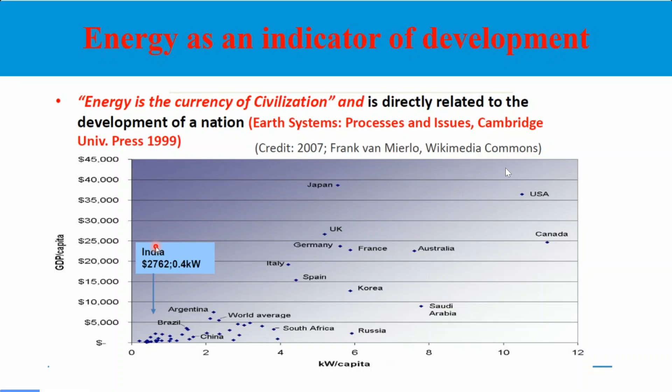Coming to energy as an indicator of development, another continuation of it. So what is GDP, the term we read in the last slide? It is basically the gross domestic product, the monetary value of all the finished goods and services provided within a country. It is given by the formula GDP equals C plus G plus I plus NX.

C is consumer spending. G is the sum of government spendings. I is the sum of all country business spending, and NX is the net export, that is export minus import.

Coming on to another term, energy intensity. It is basically the measure of energy efficiency of a nation's economy, the energy consumed per dollar of GDP produced. It is the ratio of the amount of energy consumed in the production of per dollar of GDP.

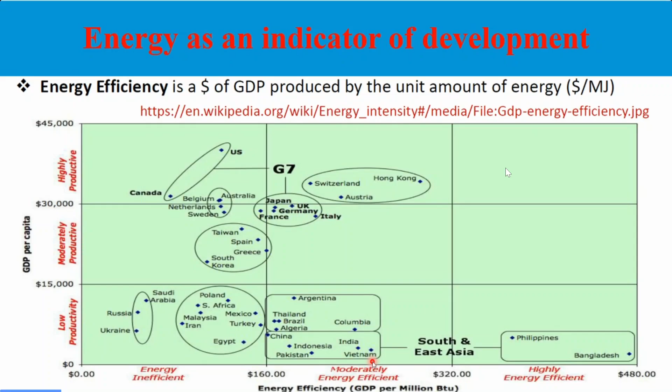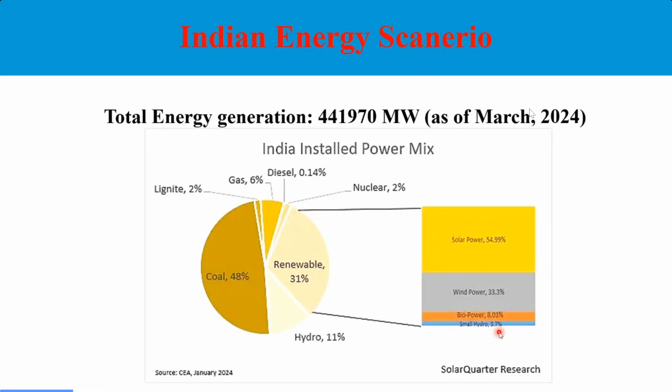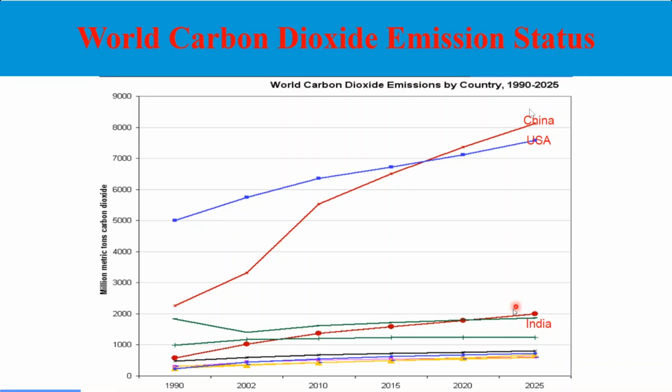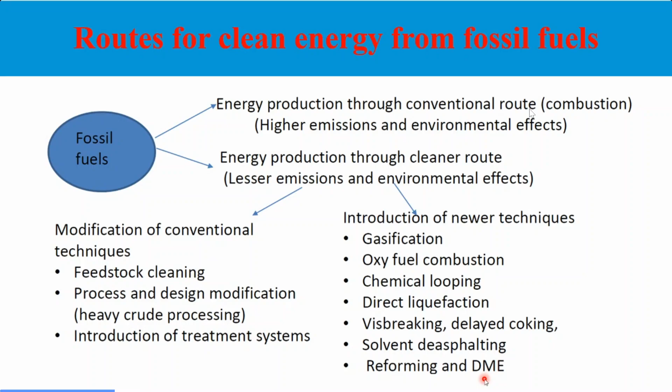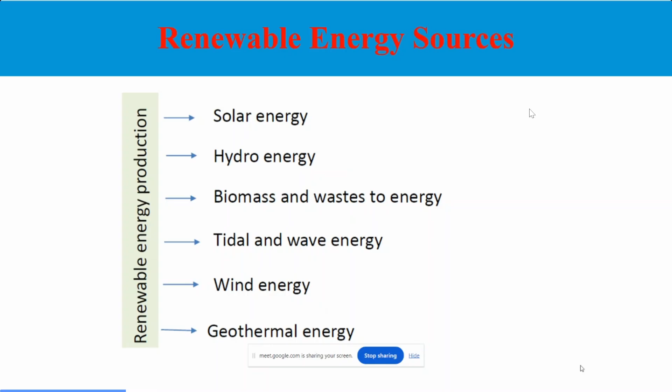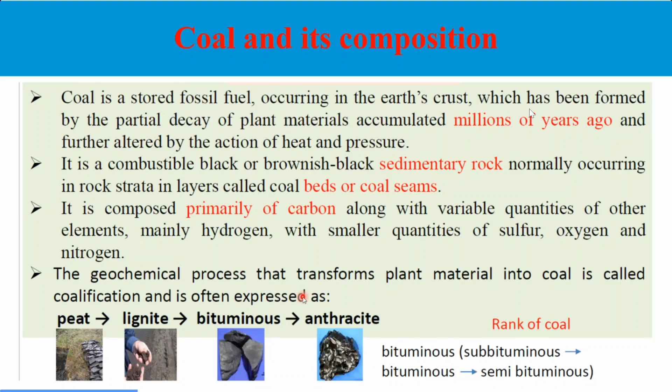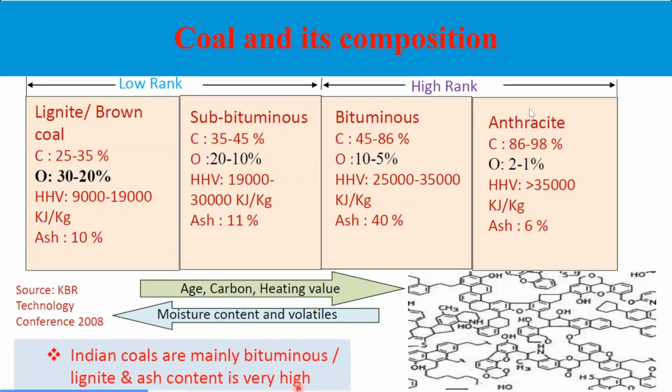Coming on to some of the coal reserves in India, there are basically two types, that is Gondwana coal and tertiary coal. Coal is found in various states in India such as Jharkhand, Odisha, Chhattisgarh, West Bengal, followed by many others. A total of 301.56 billion tons of coal reserves are estimated by GSI in India.

So, the two main types of coal are Gondwana coal, which is the more aged coal, that is 250 to 325 million years old, and tertiary coal, which is not that old, that is 10 to 60 million years old, and it has high sulfur content.

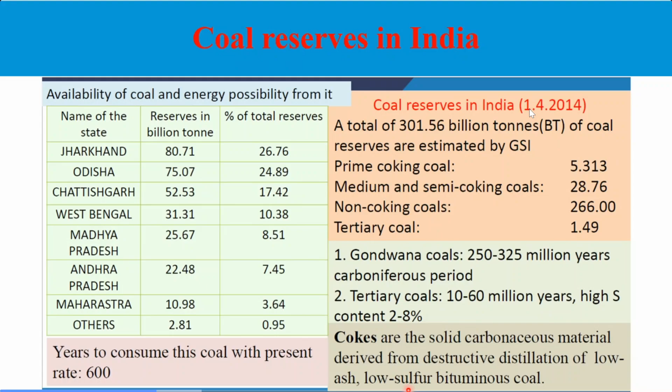Then what are cokes? Cokes are the solid carbonaceous materials derived from destructive distillation of low ash, low sulfur bituminous coal. Coming on to some other types of coals. Based on coking property, it is of three types: coking, semi-coking, and non-coking. Based on age of maturity, it is of two types: Gondwana and tertiary coal. Some other unconventional coals are also available, which are cannels and torbanites. They are rarely found and do not fall in any category.

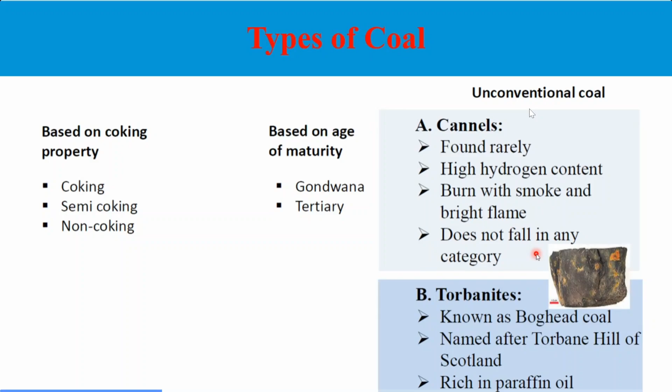Coming on to the grades of coal, the grades of coal are divided depending on the amount of moisture content and ash content present in them. Basically, coal is used in energy production in various industries. So, in the steel industry, steel grade coal is used, and in thermal power plants, washery grade coal is used. The classification is given here clearly in the table according to the percentage of ash and moisture content present in them.

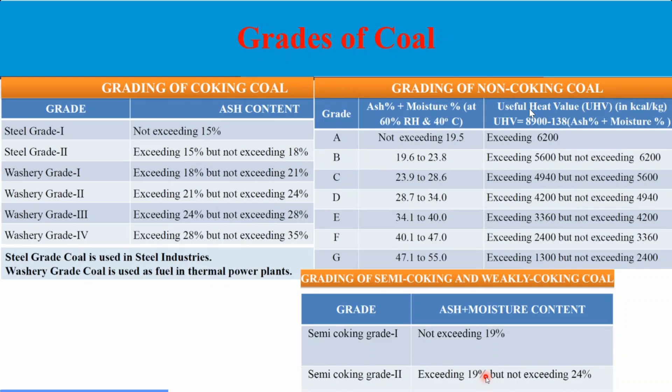Coming on to the treatment of coal, by the heat treatment of coal, three categories are found. Coke, which is the solid product from the coal. It is a grey, hard, and porous coal. Coke is used as a fuel and acts as a reducing agent in smelting iron ores in a blast furnace. Coal tar is the liquid product from the heat treatment of coal. It is a brown or black liquid of extremely high viscosity which smells like naphthalene and aromatic hydrocarbons.

And coal gas: when the heat treatment is done at a very high temperature and pressure, it gives out high calorific value gases such as hydrogen, carbon monoxide, methane, and volatile hydrocarbons.

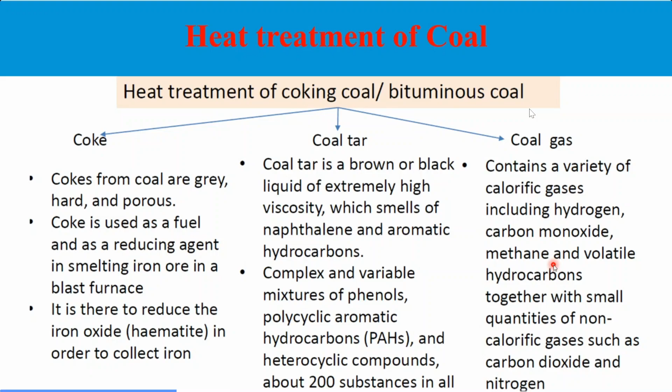Coming on to some of the properties of coal, coal has caking and coking properties, good heating value, moisture content, volatile matter content, fixed carbon, and ash content. Its chemical composition has carbon, hydrogen, oxygen, nitrogen, sulfur, and phosphorus, and sometimes iron also in small quantity. It has porosity, caking index, and swelling index, which we will be studying further.

Caking versus coking. On applying heat in absence of air, the coal swells and leaves a coherent residue. This residue is called the caking coal. In some cases, this caking coal residue possesses some metallic, grayish luster, and this type of caking coal is called the coking coal.

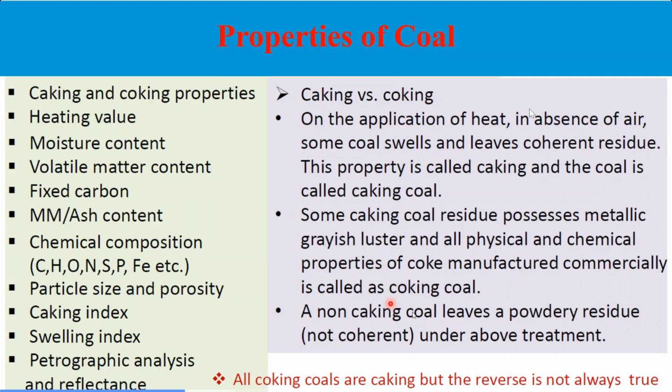Coming on to the two properties, that is caking and swelling index. Caking index gives an idea about the caking property of a coal. Basically, when we apply heat, the swelling of the coal takes place and it leaves some residue which is called the caking coal, so it gives the idea about its caking property. Normally the caking index for coking coal varies from 20 to 24, and for a beehive oven the minimum index value would be 13 and maximum 24. And the swelling index tells how much swelling of the coal takes place. A swelling index from 2 to 5 is ideal for coke manufacturing.

Coming on to the characterization of coal, it is done in basically two types, that is the proximate analysis and ultimate analysis. So, what is analysis?

In proximate analysis, basically we classify the amount of moisture, that is H2O, present on the surface or inherently present in the pores, or the residual moisture present in the coal sample. For analyzing the amount of moisture, the sample is heated at 105 degrees C for 24 hours, then the moisture is lost. Some volatile matter may also be present, which could consist of some paraffins or hydrocarbon part.

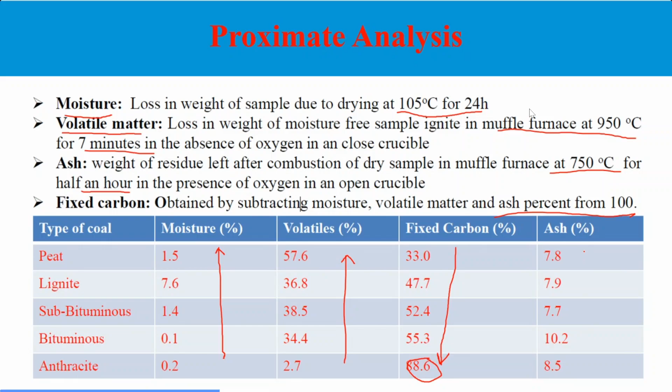The ultimate analysis is different from the proximate analysis. It is basically the elemental analysis. We can determine the amount of carbon, hydrogen, nitrogen, and sulfur present in the coal sample. The principle of CHNS is basically that the sample is heated in the presence of oxygen at a temperature of 990 degrees C. So all carbon present easily gets burned to carbon dioxide, hydrogen burns to H2O, and nitrogen burns to nitric oxide, that is NO2.

For analysis, the product gas mixture flows through a silica tube packed with copper granules. This zone is held at about 500 degrees C. So this mixture of NO2, SO2, CO2 and water is passed through a silica column. Remaining oxygen is bound, and NO2 is reduced, and the leaving gas stream includes the analytically important species such as CO2, H2O, and nitrogen. Eventually, sulfur dioxide is absorbed at appropriate traps.

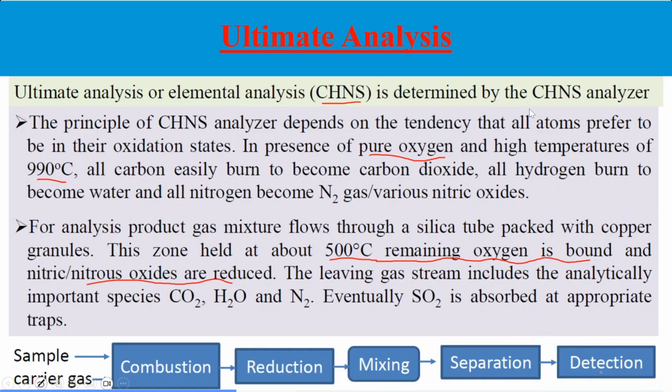So we give a sample with carrier gas, do the combustion here, reduction of the nitrogen is done, then the mixing of all the other gases such as carbon dioxide, moisture, and sulfur dioxide takes place, and then the separation and detection of the different gases is done here.

Coming on to another important characteristic, that is the heating value of coal. Basically, the heating value is the amount of heat released during the combustion of a specified amount of coal sample. It is of two types: higher heating value and lower heating value. When a coal sample is heated in the presence of oxygen, it releases heat in the form of flue gas, which is further used to vaporize the water.

So basically, a sample of coal consists of some moisture also. When this coal sample is heated, it releases heat, and this heat is also used. Basically, this heating value is calculated using a bomb calorimeter. When the sample is heated inside the crucible in a bomb, it releases heat in the form of flue gas, which heats up the material of the bomb as well as the water bath in which the bomb is kept.

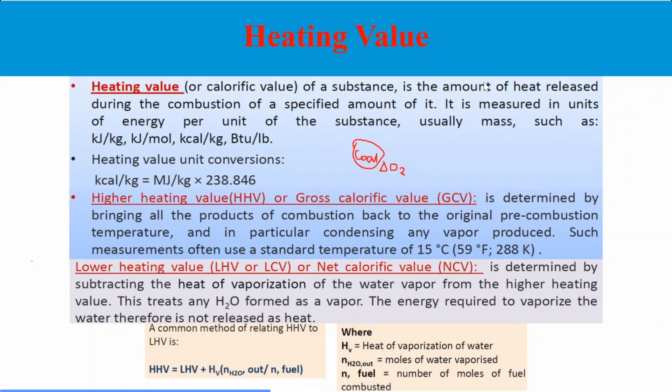Coming on to the bomb calorimeter, as I told, it consists of a crucible. This is the crucible where you keep your sample. This crucible is kept inside this bomb, then this bomb is kept inside this water bucket, and this water bucket is kept inside this container. There is a thread which is used for the combustion of our coal sample.

So by using electrical methods, this wire is burnt, which in turn burns our sample, and the heat generated from this sample heats up the bomb material as well as the water present in this water bucket. So the heat that is taken up by the material of the bomb as well as water is combinedly calculated to get our higher heating value. So bomb calorimeter is basically used for the calculation of higher heating value.

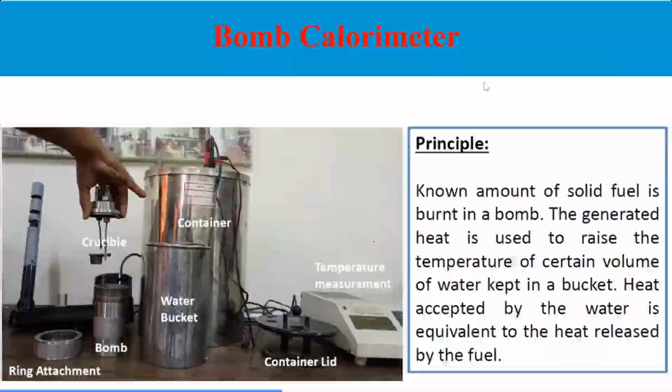But there are various other corrections which are to be made while doing the calculation of higher heating value in a bomb calorimeter. The coal sample consists of various elements such as nitrogen, hydrogen, oxygen, sulfur. So if nitrogen is present, it may get converted to HNO3, and if sulfur is present, it may get converted.

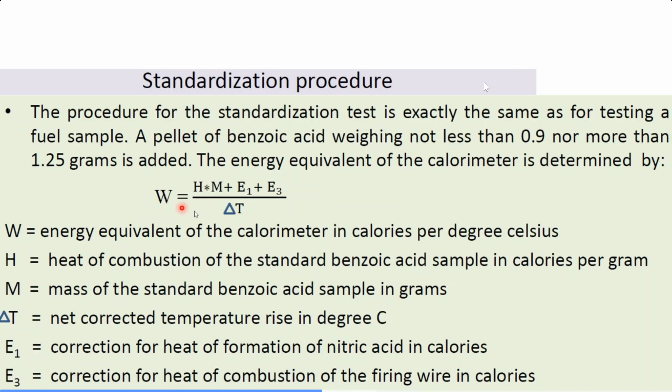Another thing is the water content. If hydrogen is there, it gets converted to water. But the water equivalent is an inherent characteristic of the bomb calorimeter. For finding out the water equivalent, we use a standard benzoic acid solution. As benzoic acid doesn't contain sulfur, the E2 correction is removed, and this formula is rearranged to get the water equivalent of the calorimeter in calorie per degree Celsius.

Coming on to the net calorific value, as we know, we can calculate the gross calorific value from the bomb calorimeter. So for net calorific value, this is the relation given here. We put the gross calorific value, and this is the amount of hydrogen present in the sample, and it is given in BTU per pound. But if we want it in other units, then these are the relations.

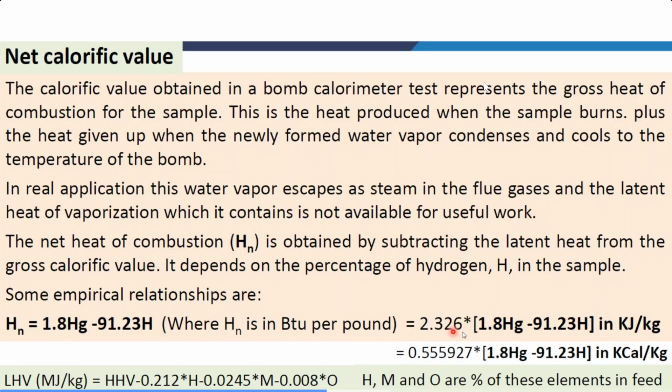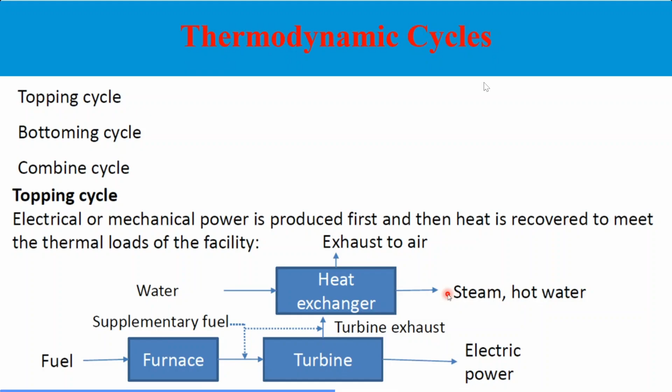The bottoming cycle is opposite, where we induce the fuel into the furnace. Firstly, we recover the heat from the boiler, and this heat is used for the generation of steam, which is further taken to the turbine to generate electric power. The third one is the combined cycle, which is a hybrid cycle.

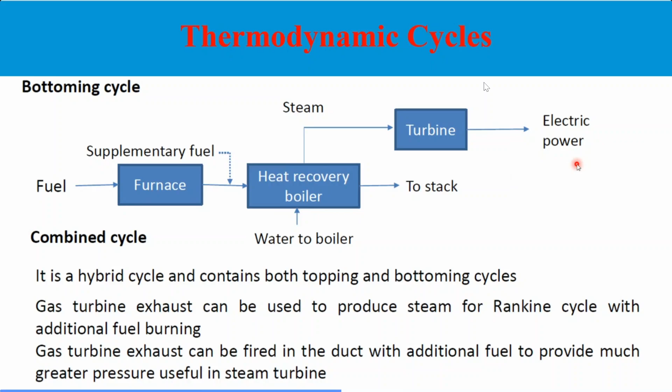It produces both steam as well as electric power simultaneously. So it is basically called cogeneration. This technique is cogeneration, which produces both heat and power simultaneously. And the other technique is trigeneration. In trigeneration, not only heat and power, but along with that combined cooling is also done.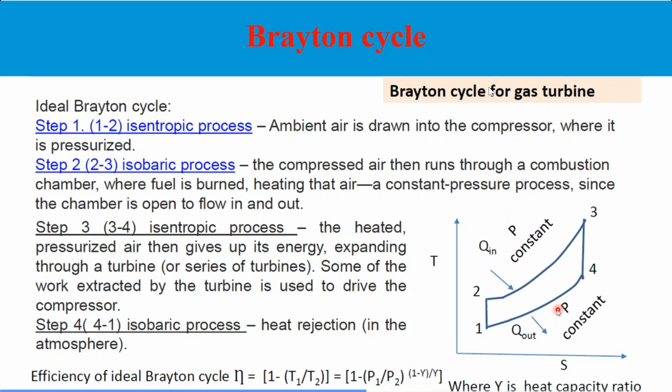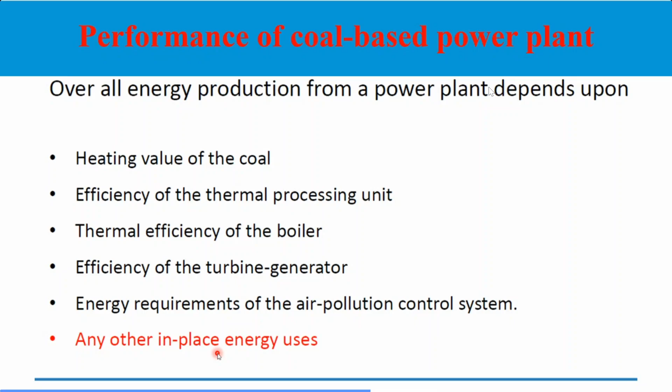And these are the factors influencing power efficiency: the pressure of the steam produced by the boiler, standard at 40 bar or 600 psi, or high pressure at 65 bar or 950 psi or higher; the type of condensing device, air cooled or water cooled; the heat source to preheat combustion air if preheating is necessary, steam or energy recovered from flue gas; and the number of boilers and turbines used.

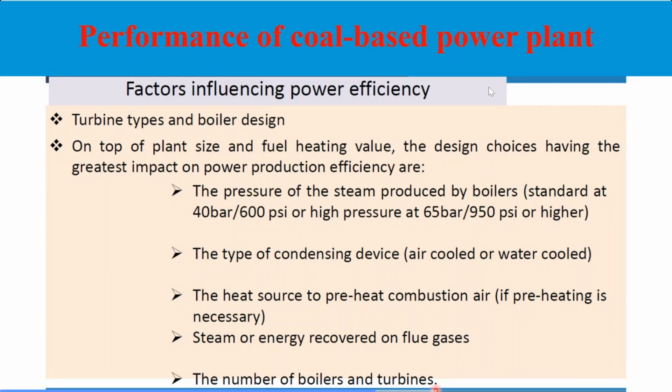So let us conclude. Wrapping up the theory session, let us come to some of the questions from the old assignments. The first question: which of the following is not a renewable source of energy? It is hydrocarbon energy. In India, renewable energy sources contribute around 17 to 25% of total electricity production.

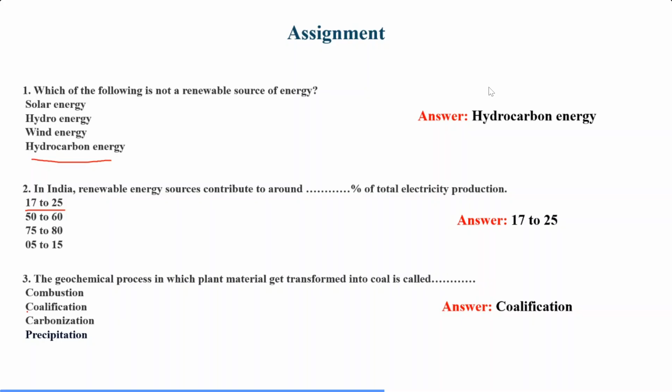The third question is, the geochemical process in which plant material gets transformed into coal is coalification. Coming on to the fourth question, which of the following grades of coal is normally used in thermal power plants? The answer is washery grade.

The swelling index helps to test the coking property of coal. The ideal value of the swelling index for coke manufacturing varies between blank. The ideal value is 2 to 5.

The sixth question: in proximate analysis, volatile matter is measured by heating a moisture free sample in a muffle furnace at P degrees Celsius for Q minutes in the absence of oxygen in a closed crucible. Please choose the appropriate values of P and Q. The answer is 950 degrees C for 7 minutes. So P is 950 and Q is 7.

So coming on to this numerical.

So coming on to this question, which says a coal sample with 1% sulfur is combusted in a bomb calorimeter. The temperature of the bucket water increases from 25 degrees C to 28 degrees C. The water equivalent of the calorimeter is 2402 calorie per degree Celsius. So this is the water equivalent, that is W value. This is sulfur content, which is the correction to be made, that is C2 correction, and the temperature difference delta T is 25 to 28, that is 3 degrees C.

The 2-gram sample is used for the test, that is the mass of the sample is 2 gram, and the Parr 45C10 wire is used for the ignition. So out of 6 centimeter wire, 2.6 centimeter is used. Sorry, this is unused. So for used, we will do 6 minus 2.6. We will be getting the correction C3. To titrate the calorimeter washing, 20 ml of 0.0709 normal sodium carbonate is used. This is the standard solution, so this will be the C1 correction.

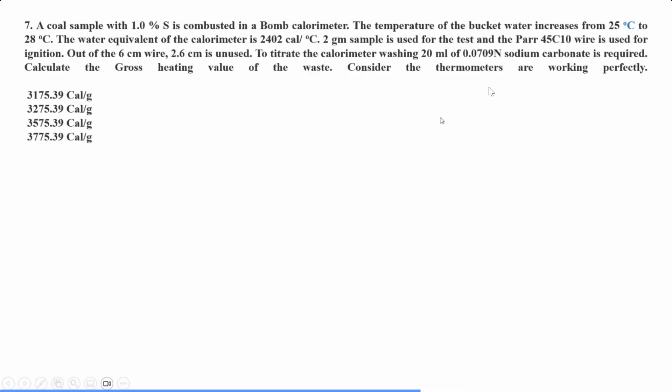So we have to calculate the gross heating value, that is the higher heating value, considering that the thermometers used are perfectly fine, perfectly working. So this is the formula, as I told during the theory session, that we need to use. The formula for higher heating value is the temperature difference into water equivalent minus three corrections, that is the nitric acid correction, sulfur correction, and the fuse wire correction, upon mass.

So all the values are given. Temperature difference is 3, water equivalent is 2402. The E1 correction is C1. This is calculated. E2 is calculated by 13.7 into the sulfur percentage, that is 1, into 2, the mass. So we get 27.4, which is written here, and E3, which is 6 minus 2.6, that will be 3.4, into 2.3, since we used Parr 45C10 wire. So we get 7.82. By putting all the values in, we get the higher heating value, that is 3575.39 calorie per gram.

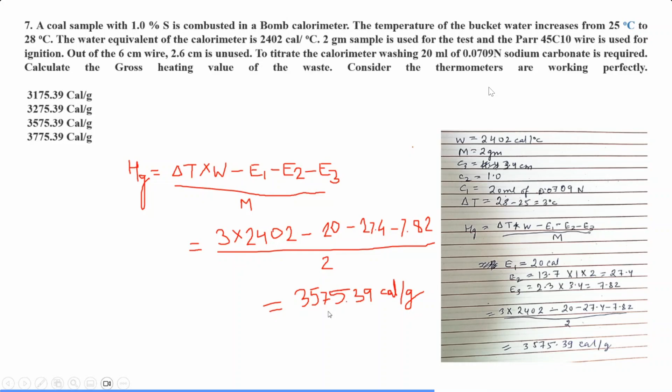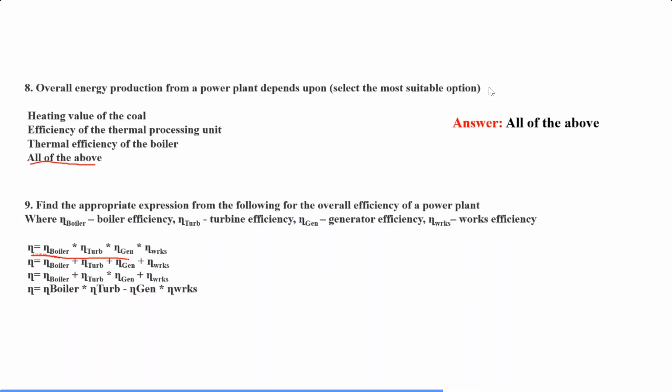Coming on to the next question, overall energy production from a power plant depends upon all of the above. Coming on to the next question, that is find the appropriate expression from the following for the overall efficiency of a power plant. Overall efficiency of a power plant depends on the boiler efficiency, turbine efficiency, generator efficiency, and works efficiency. So what would be the correct formula for it? It is the first one, that is boiler efficiency into turbine efficiency into generator efficiency into works efficiency.

So simply what we will do, we will introduce the amounts of these contents. So let us assume a sample of 100 gram. So, just a second.

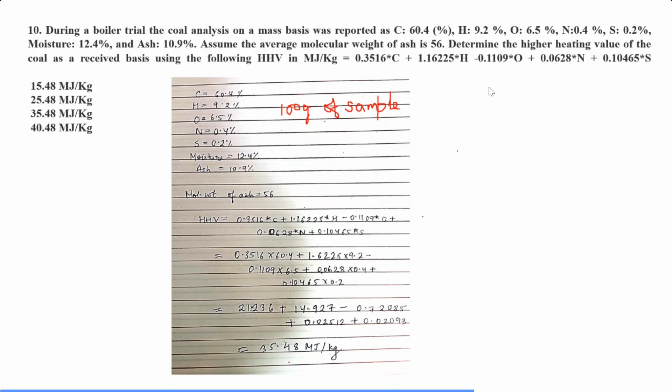Now coming to some additional questions. Gross domestic product, GDP, is given by C, consumer spending, G, government spending, I, country's business spending, and NX, net export, that is export minus import. So what is the correct formula? GDP equals C plus G plus I plus NX.

After that, bituminous, it will be 45 to 86%. Then less than bituminous is subbituminous, that is 35 to 45%. Then lignite, the least amount, that is 25 to 35%. So the answer is: lignite is the smallest at 25 to 35%, subbituminous more than that at 35 to 45%, bituminous more than that at 45 to 86%, and the largest amount of carbon percentage is in anthracite, 86 to 98%.

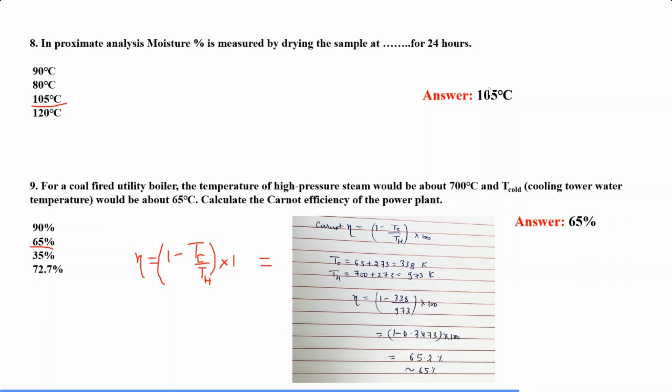The acid titration required 12 ml of standard alkali, and 8 centimeter of Parr 45C10 nickel chromium fuse wire was consumed. So 8 centimeter was used for C3 correction, and 12 ml for C1 correction, to determine the water equivalent. C2 correction will not be made since there is no sulfur present in the benzoic acid. For C1, it is used as it is, there is no such formula. For E3, since Parr 45C10 wire is used, the formula is 2.3 into C3, that is 2.3 into 8, the amount of fuse wire consumed. After doing all the calculations and putting in the values, we get a water equivalent value of 2406.1 calorie per degree Celsius.

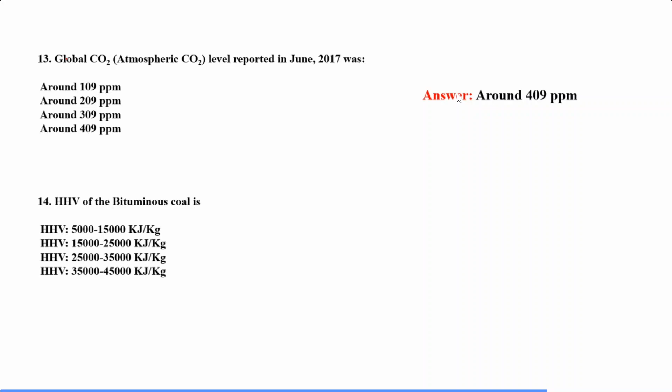Coming on to the next one: the higher heating value of bituminous coal is 25,000 to 35,000 kilojoule per kg.

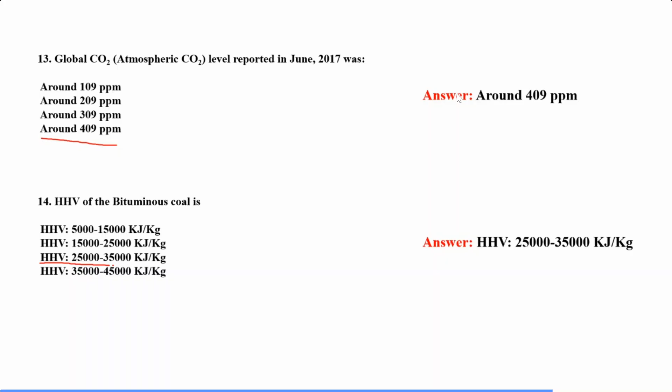Coming on to the 15th question: which moisture type is an integral part of the coal seam in its natural state, including water in pores, but excluding that in the macroscopically visible fractures? So the moisture present in the macroscopically visible fractures is the surface water, while water present in the pores is basically the inherent moisture.

So, what is true about swelling of coal? It helps to test the coking property of coal. Swelling index varying between 2 to 5 is ideal for coke manufacturing. The high swelling coal is not charged for coke making as it would create unnecessary pressure on the walls of the oven, and would also produce a porous coke structure, or all of these.

The answer is all of these. All of these statements are correct for the swelling index of a coal sample.

Coming on to the 17th question: which one is not a classification of thermodynamic cycle - topping cycle, bottoming cycle, combined cycle, or none of them? The answer is none of them, since all these three are thermodynamic cycles.

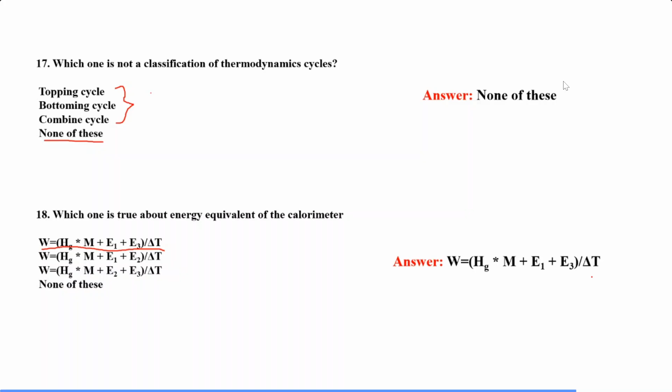Coming on to question 19: match the following emissions from the fossil fuels through conventional routes in the best possible combination. These are the various elements present in the emission from fossil fuel: carbon dioxide, NOx, that is some amount of nitrogen dioxide, etc., then sulfur dioxide and particulate matter.

So what is subcritical, and let me explain subcritical and supercritical. What is desirable is the decrease in emission, that is hazardous environmentally polluting emissions from the various emissions done from the fossil fuels.

So basically to reduce them, as we can see, if we perform the emission in subcritical state, then the emission amount is this, in gram per kilowatt hour. But in supercritical we can see that these emissions are reduced.

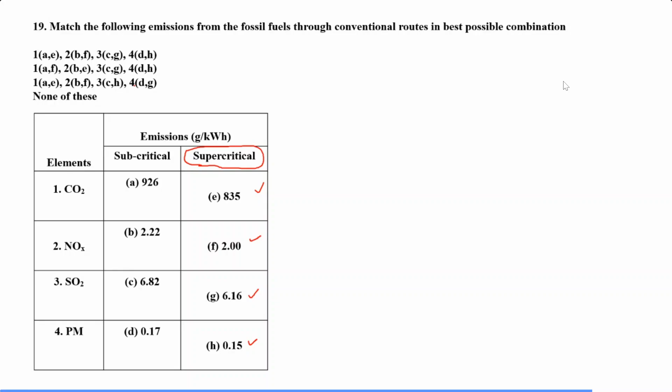So what is desirable is we want to shift to supercritical, which is not yet practiced, but if we shift to supercritical condition, then the emission will be decreased, which is desirable: 835 is less than 926, 2 is less than 2.22, 6.16 is less than 6.82, and 0.15 is less than 0.17. So basically the answer is they are correctly written: A to E, B to F, C to G, and D to H. So the answer is the first one.

Coming on to the last question of the session, which is a numerical: during a boiler trial, the coal analysis on mass basis was reported as these. These are the various elemental content percentages given here. The molecular weight of ash is given as 56.

So we have to find the molecular formula of the coal and the heating value on as-received and dry basis. The formula for high heating and lower heating value is given here by these equations, where W is the percentage of moisture and H is the percentage of hydrogen.

So let us come to the solution. Firstly, let us try to solve this part, the molecular formula of the coal.

For the molecular formula, we want to calculate the mole of each component present in the coal sample.

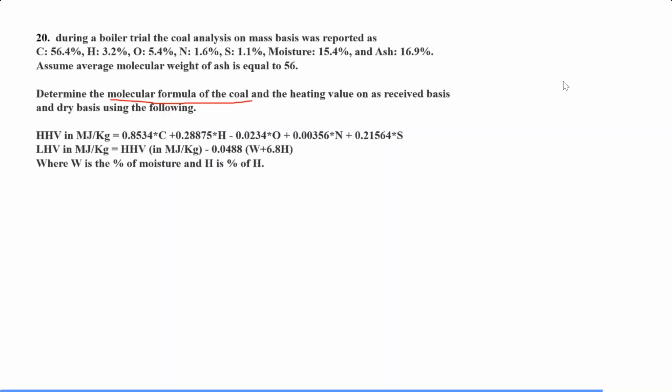Let us form a table and write all the contents on as received basis. We will assume 100 gram of sample. So by assuming 100 gram of sample, as per the content given in the question, they consist of 56.4 gram of carbon, 3.2 gram of hydrogen, 5.4 gram of oxygen, 1.6 gram of nitrogen, 1.1 gram of sulfur, 16.9 gram of ash, and 15.4 gram of moisture.

This is the percentage on as received basis, and assuming 100 gram of sample, these are the mass of each element. The molecular weight of each element, as we know: carbon 12, hydrogen 1, oxygen 16, nitrogen 14, sulfur 32, ash is given in the formula as 56, and for moisture it is H2O, which is 18, that is 16 plus 2 is 18.

The moles are calculated by mass of element upon molecular weight of element, that is 56.4 by 12 is 4.7, 3.2 by 1 is 3.2, 5.4 by 16 is 0.3375, as it is. Likewise, similarly, we will calculate all the moles of the different components present.

So now we know the moles, so we will be writing the formula, which will be written as C 4.7, H 3.2, O 0.34. From here we will be taking all the moles and writing down as it is.